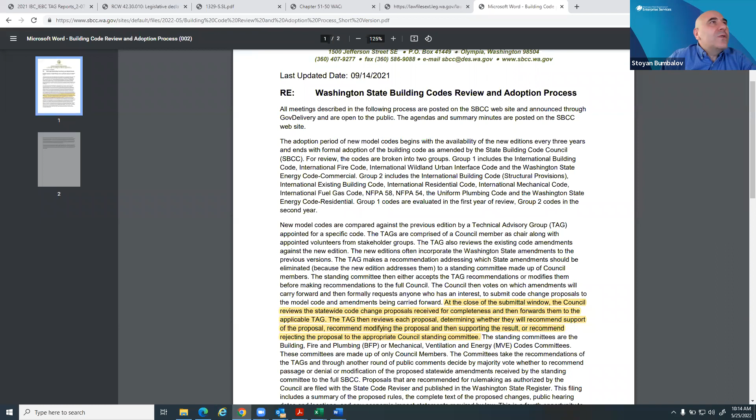Okay, and then we will start with the first proposal. I can hear my voice. Yeah.

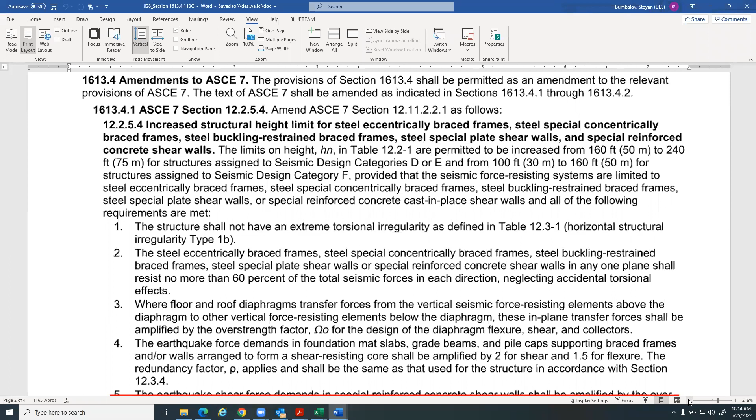I'm very pleased to present this proposal because it represents a big success of the State Building Code Council. The proposal removes an amplification for design forces for concrete shear walls. The State Building Code Council added this to the building code based on state-of-the-art research a few years ago, leading the nation in requiring amplified forces.

The reason I'm proposing to remove it now is because the national design building codes have caught up, and a similar requirement to amplify forces is included in the ACI 318 building code now. It's slightly different, but the intent is the same. So to avoid confusion, I'm proposing to remove this one line and three words that we see on the screen right now.

This proposal has been reviewed by a number of engineers. I see a couple of them are also here today. It's been proposed by design engineers as well as code officials, and we're in agreement that this line should be removed.

Just to clarify, the language you see here is section 1613.4. There was a little confusion at the previous meeting - this is a state amendment, not in the model code. It was adopted in the 2018 IBC. So what was previously added as a state amendment is being proposed to be removed. This isn't a change to the international code, the standard code - it's just a change to the Washington State Building Code amendments.

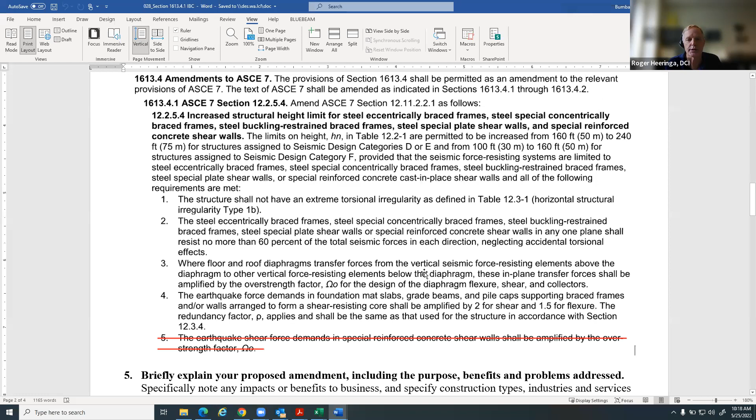Yeah, I will comment as a practicing engineer. I think if you go down to the very end of section 5, Stoyan, if you can page down - I think the critical comment as far as I'm concerned as a practicing engineer is that the second sentence of that larger paragraph, without removal of the section, it is unclear whether the factor referenced by the amendment and the factor referenced in the standard should be used together.

So the factor is you're basically increasing the shear demand on a wall by 2.5 times when you're actually designing a shear wall, and without removing it, there could be engineers and/or code officials who would enforce that you have to apply the 2.5 times twice. So it would be a factor of 5, or maybe even 6.25 if I do the math right. Very clearly, it is not intended that that factor of 2.5 get applied twice. So from my perspective as a practicing engineer, this makes complete sense.

Thank you, Roger. Andrew, please. I just wanted to also verify, as chair of the ACI 318 committee currently, that it was definitely our intention to insert the modification shown here on the screen for the same reasons that the state adopted the amendment originally. So we have essentially codified what the amendment was, so it should be removed from the current state amendment.

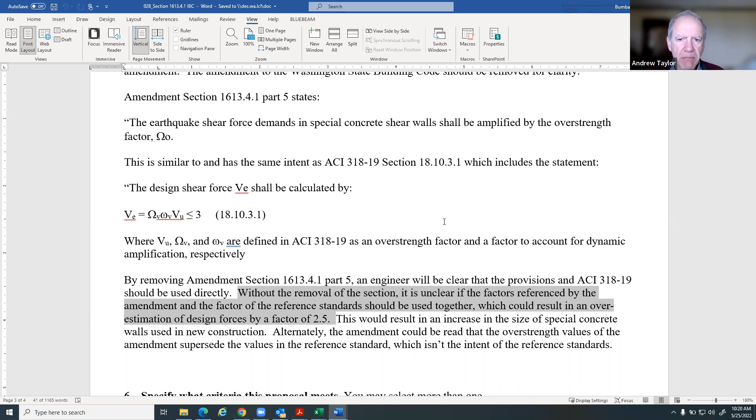Thank you, good comment. Anyone else? Okay, seeing none, the motion is to recommend, as I'm hearing, as written, as proposed.

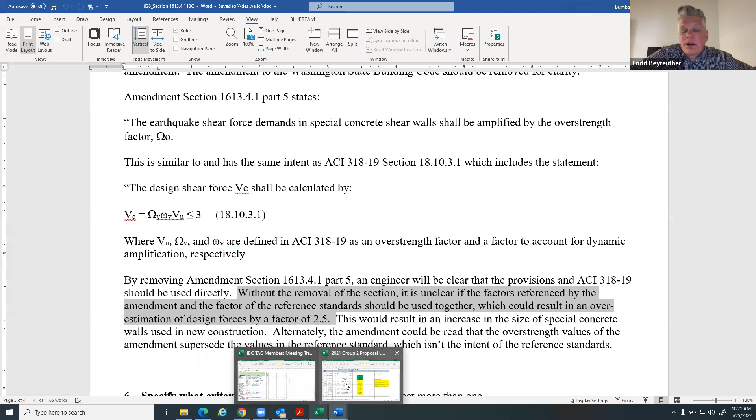Let's try a voice vote. All those in favor signify by saying aye. Aye, aye, aye, aye. Any opposed? Nay. Okay, then that passes. We will move forward for recommendation. Thank you.

Okay, second proposal for today, please - number 31. This is for tsunami loads. This is another one that is a state amendment.

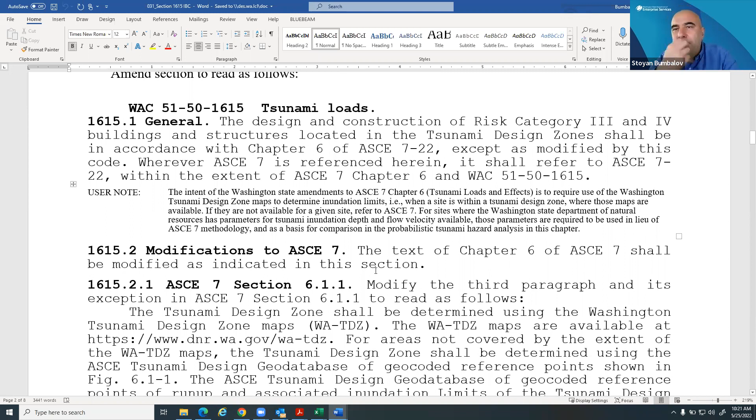There was an ad hoc tsunami TAG for a while, a very qualified group of stakeholders that I see some of on the line right now. So I see John Sue - would you like to speak to this, or Cale Ash?

Yeah, good morning Todd, I can speak to this one, and then maybe John can fill in any additional background. Thank you. So I'm Cale Ash, a structural engineer and principal at Degenkolb Engineers.

As Todd briefly noted, we were part of an ad hoc technical advisory group that formed about a year and a half ago, late 2020, to look at bringing some of the Washington Department of Natural Resources developed tsunami hazard maps into the Washington State Building Code. Those changes were made to the adoption of the 2018 IBC through emergency rulemaking, as I understand the process. The code change proposal here essentially extends the use of the Department of Natural Resources maps into the adoption of the 2021 IBC.

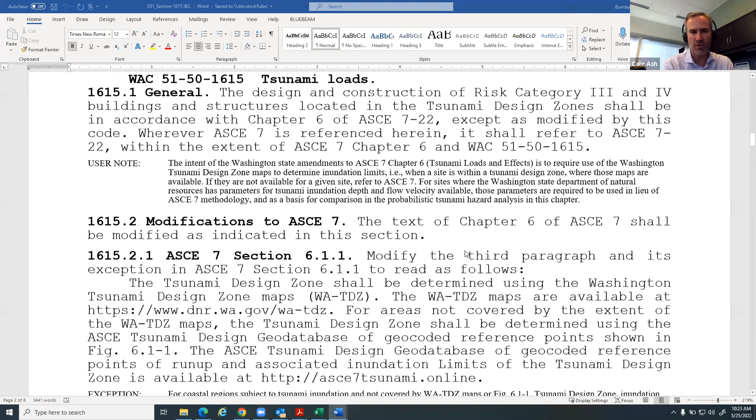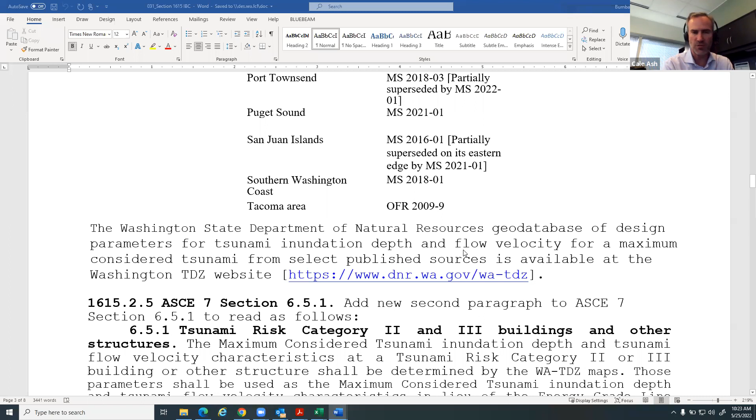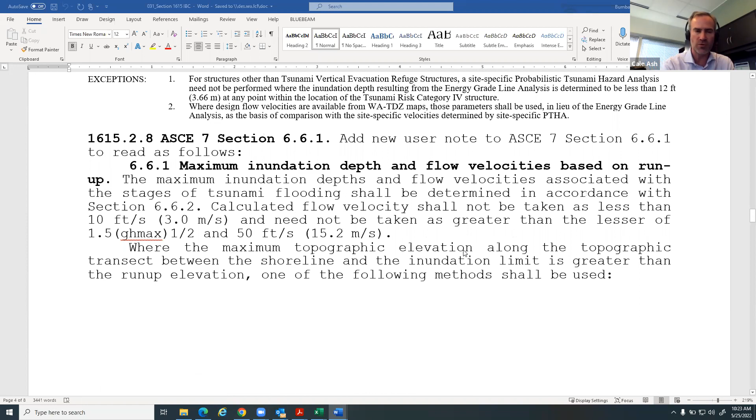The other main change proposed here is an early adoption of ASCE 7-22, Chapter 6, which deals with tsunami loads and effects for buildings. That chapter was just published in the ASCE 7-16 version, and there have been quite a few technical updates incorporated into the 7-22 version. So the code change proposal does two main things: adopts the Washington Department of Natural Resources tsunami hazard maps for design purposes, and represents an early adoption of the technical provisions in ASCE 7-22 for the state.

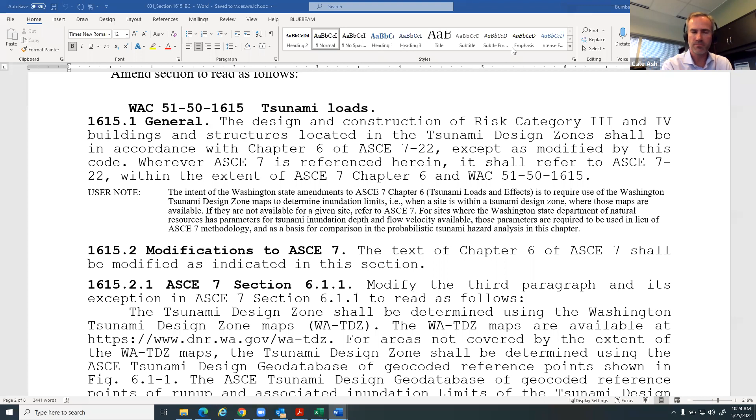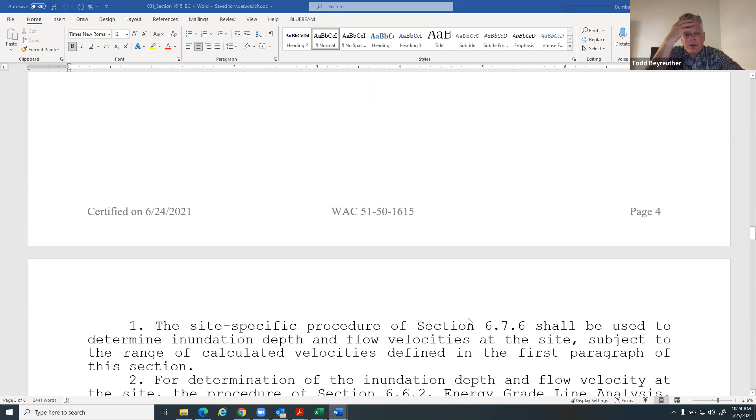Thank you, Kale. And just a little more background - so that ad hoc tsunami tag, we dissolved it after the temporary and permanent rulemaking was complete in the 2018 code. And so now this is a proposal for the 2021 code.

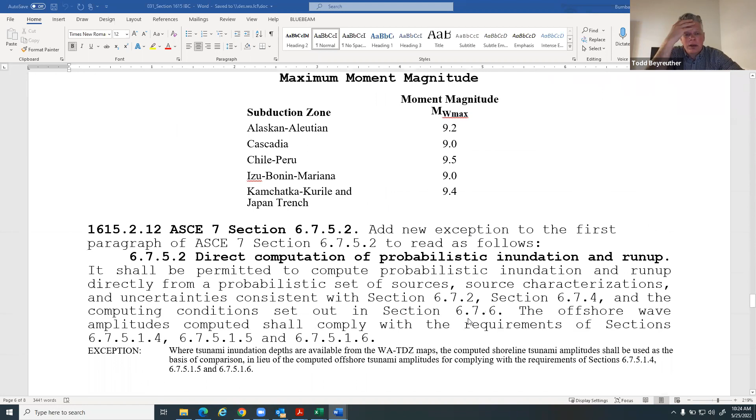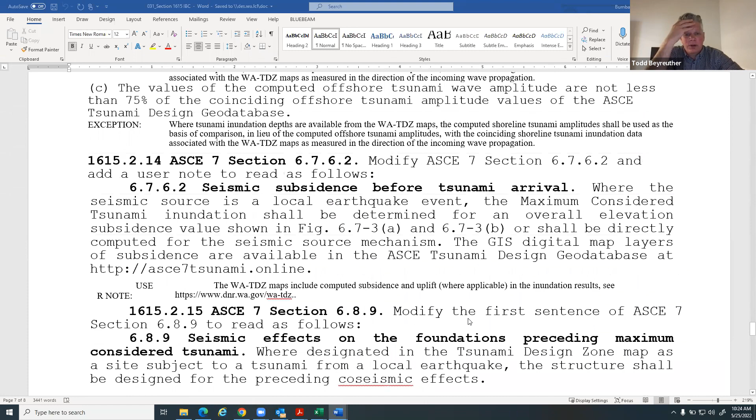Kale, or John, or Karina, can you advise us - this is meant to replace what is written now, it's not edits to that current amendment, right? This is intended to completely replace the section that's in the 2018, right? There are changes to this, right? Or is it just an update of the maps?

Yeah, John, can you step in? Yeah, I think the intent is - if I recall how you guys put it together - I think it is to replace the provisions that were there already, because we essentially are rewriting several of them due to the adoption, or pre-adoption, of ASCE 7-22 provisions. The other thing to clarify is that the Washington State DNR maps have been updated since the emergency rule and the permanent rulemaking was done.

And so we are adopting basically the latest maps that DNR has at this point in time. If you compare the list of maps, which is a little further down, it's a longer list. Essentially, at the time of the old tsunami tag, there were fewer maps available. Now DNR has extended it - the DNR maps cover pretty much everything in the state that's subject to tsunamis, except Point Roberts, I believe, which is the only one still outstanding.

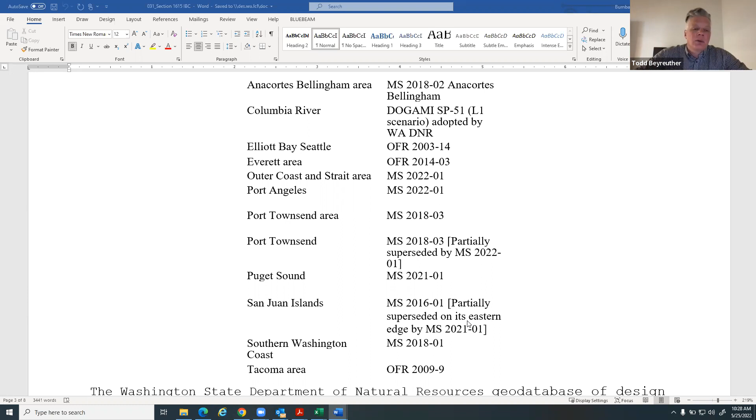Certainly. Stoyan, and for everyone's sake here, what we're talking about is this tag. The first step in group one was to go through and review the existing Washington State amendments in the 2018 code and determine what should carry over, and what should be overwritten by the 2021 code - either the model code, or in this case, overwritten by this proposal.

So do we need to take action on the master spreadsheet? Does the tag need to take action to strike that? No. My point here is, when we are introducing a proposal, we need to show the changes, right? So if we are deleting something, it needs to be shown with strikeout.

If it's new language as part of an existing proposal, it needs to be underlined. This proposal was submitted with no strikeout, no underline, so we consider this a brand new proposal that will replace the existing language. If this is the intent, we will follow that, showing the strikeout in WAC for the entire section and showing the new one. But if the intent was to keep the existing language and modify just parts of it, then we need to see it as underline and strikeout.

I think the question here is, my interpretation of this is a complete section. That's the way it was written. Yes, that's correct. Okay, good enough.

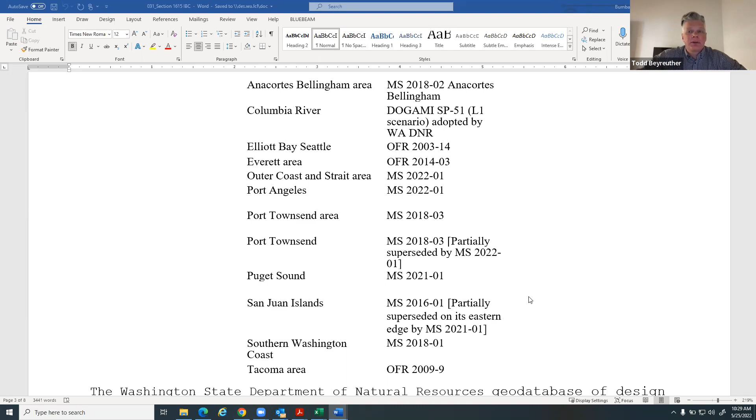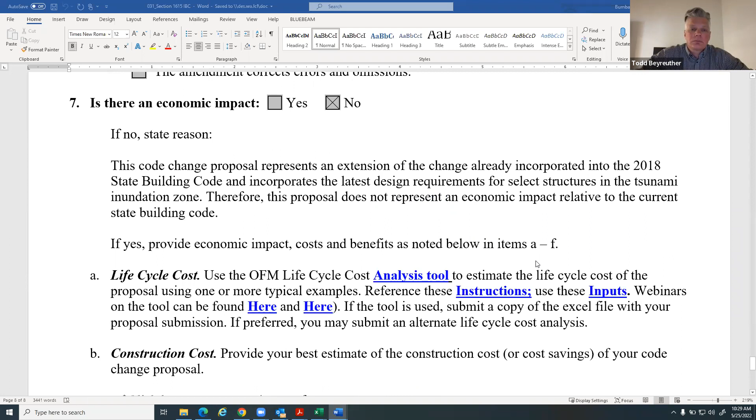Okay, thank you for that. I guess we haven't done a motion yet. Can we hear a motion to recommend this proposal to the BFP committee, please? This is Chris, I'll move to recommend it to the BFP. Thank you, Chris. Can we hear a second, please? This is Sue, I'll second. Thank you, Sue. Okay, any other deliberation, proposed amendments?

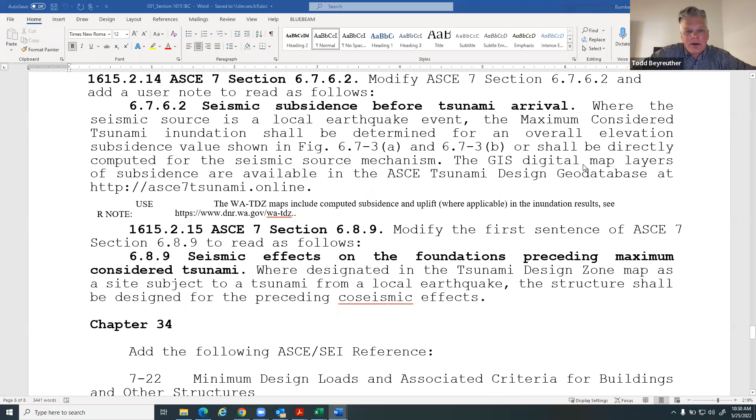I'll say that this has been a very thorough public process. I think it's a model of how the state should do this, in collaboration with other agencies and of course stakeholders. So strong support for this.

Roger, please. Yeah, I'm just wanting, in general, I understand, agree with it. I just want to make sure I understand exactly what section of which code we're taking out and what section of which code we're adding in. And that can be handled later if the tag is going to move it forward and the exact language gets worked out before final approval, that's fine. So I'm just asking for more clarity on the code process. The document itself and the information seems...

Sure, go ahead. Do you see the WAC 51-50-1615 on the screen? Okay, so this is what we currently have, this is what's codified. And the typical way is, if this existing amendment, which is a state amendment, a state addition to the code, is modified, we need to show the modifications with strikeout and underline. However, the proponent is proposing we strike out everything that is adopted here and replace it with that.

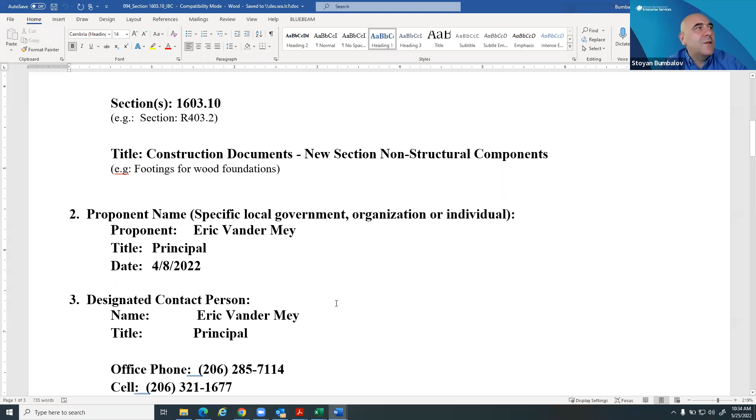The next one is 94, Section 1603. This is a new section, so for this one we don't currently have anything. It's a new proposal, section 1603.10.

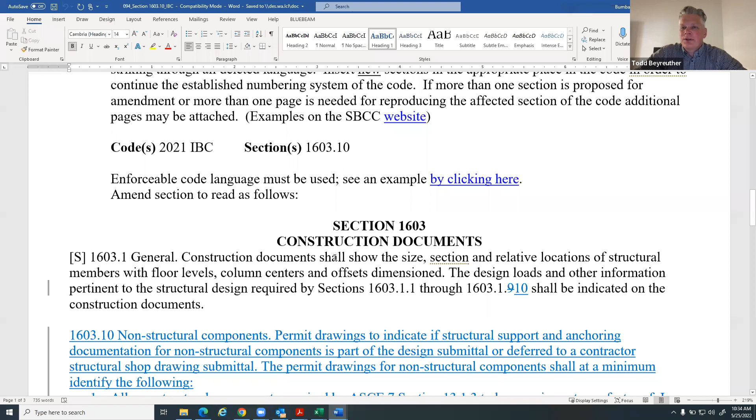Okay, do we have the proponent? The proponent is Eric. Oh right, okay, we tabled to wait for Eric. I see Eric on here. Eric, would you like to speak to your proposal? Yes, thanks. So this is a proposal to add a section. This was proposed under Group 1 and then withdrawn, and I was asked to propose it under Group 2. So the tag has seen this language a while back. I was asked to move it to this section, which documents the requirements on the drawing.

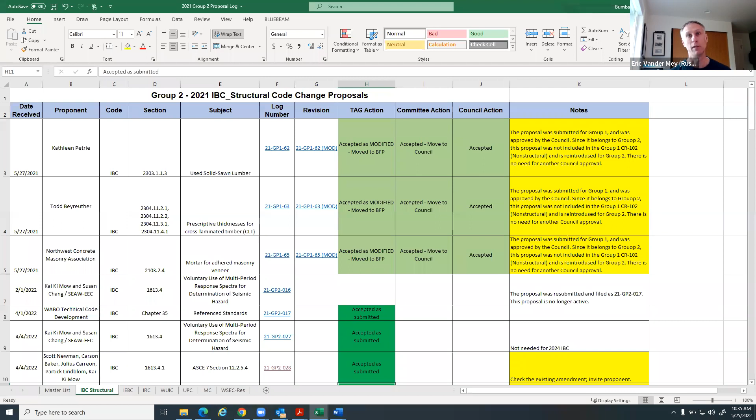So again, this is adding language to require permit drawing sets to include information about the non-structural components, specifically to indicate if the structural support and anchoring document is part of that design submittal, or if it's going to be deferred to a contractor shop drawing submittal. So that's kind of the first part.

And then specifically the drawings, whether mechanical, electrical, plumbing, or architectural, would need to indicate all components that they're interpreting for ASCE 7 - all non-structural components required to have an IP of 1.5, and anything required to be a designated seismic system.

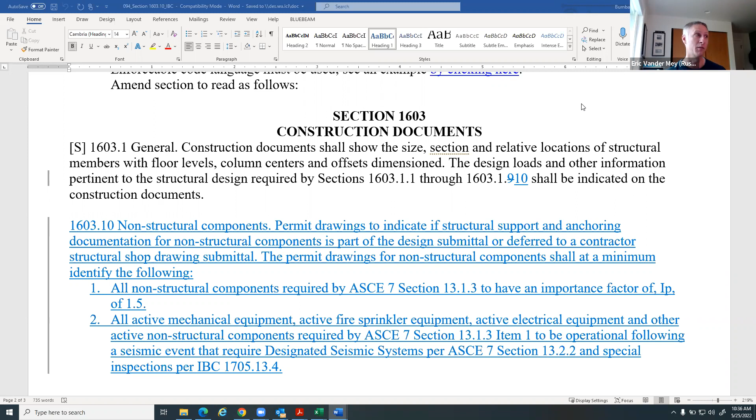This is trying to allow code officials to at least review how ASCE 7 is being interpreted on the project. We're seeing huge variation between jurisdictions in the state on how these sections are enforced for non-structural components - things like mechanical equipment, electrical equipment, generators, switch gear, stairs, and other components not directly part of the structural system.

There are requirements in ASCE 7 for seismic tie-down calculations and anchoring documentation, whether it has an IP of 1 or 1.5 as part of a life safety system, or part of a natural gas system like a boiler with an IP of 1. Some jurisdictions are interpreting that stairwell and elevator pressurization fans need to be active mechanical equipment, part of the designated seismic system, and operational post a seismic event.

By having this documentation in the plan set, it allows the code official to comment early on whether components are required to have this level of calculation and documentation. Some jurisdictions are requiring specific shake-table tested fans for pressurization fans - again, high variety around the state in what's being required. This is a first step in getting documentation into plan sets so we can improve enforcement around these code sections.

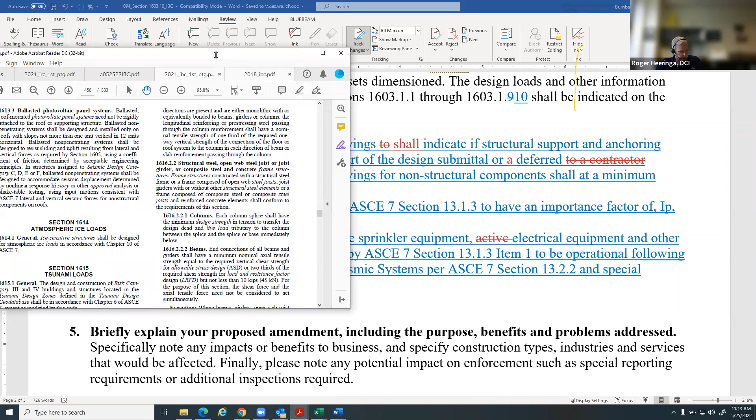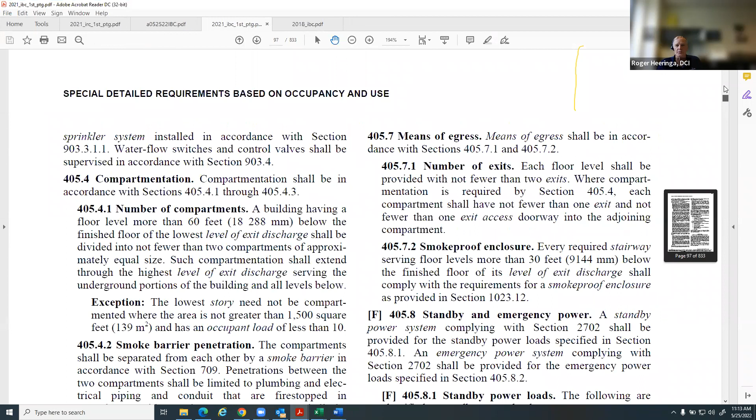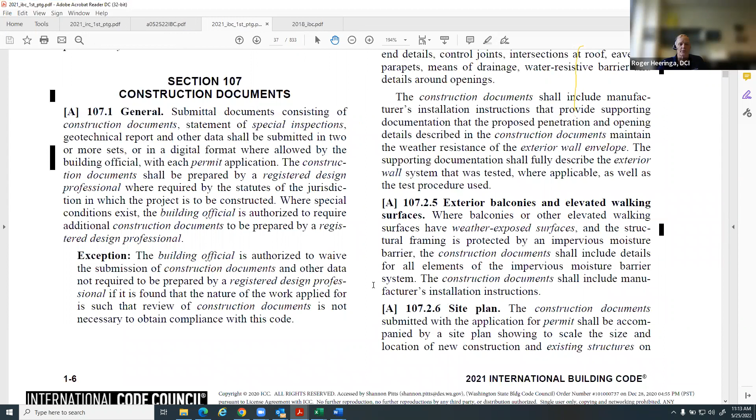107.2 is construction documents, and it kind of is defining construction documents. 107.3 is examination of documents, unless that's different in the 2021 IBC. I feel like this fits better in 107.2, where you're defining what needs to be included in the construction documents. Dorian has it up here.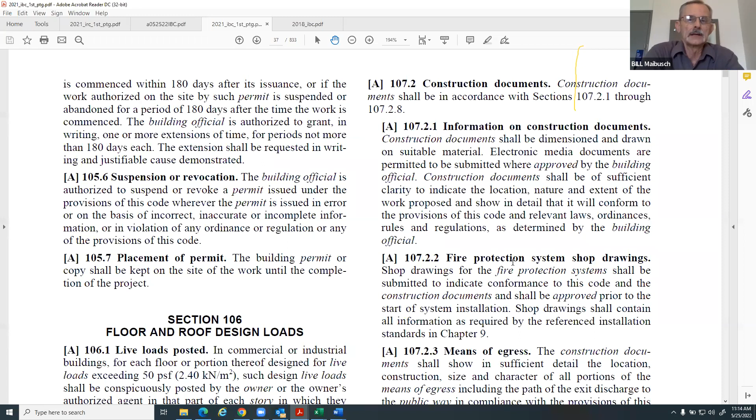So that's my comment. 107.2, I would agree. Bill, just a question. When you say all equipment, that sounds like a broad statement. Does that mean every piece of functional equipment in a particular building, or are we only talking about something required for fire life safety? Only the things in that statement that are required to be a designated seismic system, is the way the sentence reads, I think.

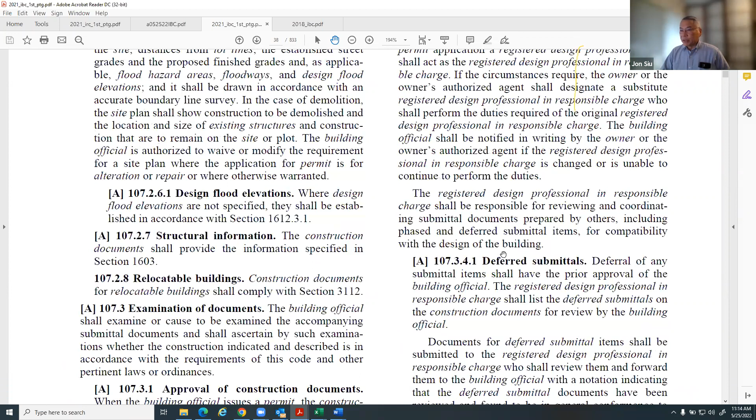Okay, thank you both, John. I want to suggest, actually Stoyan was there before, 107.2.7. It's on the next page there. Maybe as a part of that, or as a separate subsection to that, would be the appropriate place for this. 107.2.7.1, yeah, that would be the suggestion.

Okay, Scott. Well, John, 107.2.7 is again a section specifically related to the structural documents, so not this necessarily. I would disagree with that. Construction documents is not just structural. Well, no, 107.2.7, the title of that section is structural information. I know, but the titles are not enforceable, it never says anything. The titles are not enforceable, number one. Number two, again, this is structural information, right? It doesn't necessarily pin it to anybody.

Well, the language talks about non-structural systems. Yeah. It'd be a new section, 107.2.9, I guess. Or, yeah, I was going to propose that. I mean, 107.2.9, it's a different requirement, so that will fit in, I think.

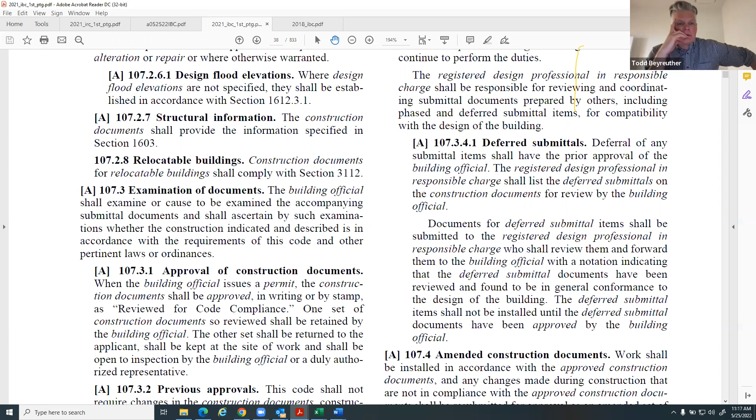So going back to the proposal then, Stoyan, I guess we've landed on this as section 107.2.8, correct? Okay, fair enough.

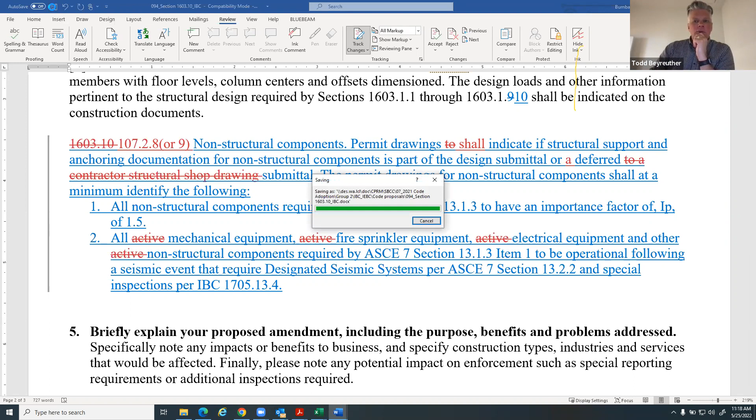Okay, are we in a good place? I guess I'll ask for a motion to recommend as modified to the BFP committee. I'll make that motion to move it to the BFP committee as modified. Thank you, Roger. We hear a second? This is Al, I'll second that motion. Thank you, Al. Okay, any final deliberation?

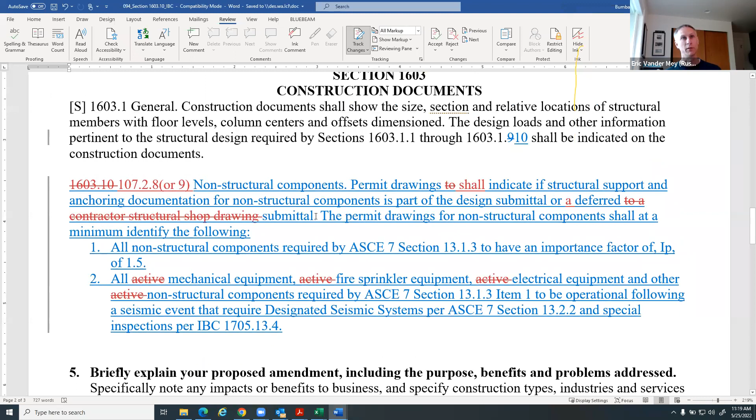All right, I got one more editorial comment. It probably should say construction documents and not permit drawings at the beginning, but could we go back to the Word doc, Stoyan, please? I don't know what that is. Can you say that again, Eric? Where the two instances where it says permit drawing, should it say construction documents?

Yeah, this is Roger. I think that it should, because that's what 107.2 is, construction documents. Okay, and the next sentence has that also. Is that agreeable to everyone? Okay, thank you.

Okay, if we're ready, all those in favor signify by saying aye. Aye. Aye. Any opposed, nay? Or abstentions? Okay, then that passes as modified.

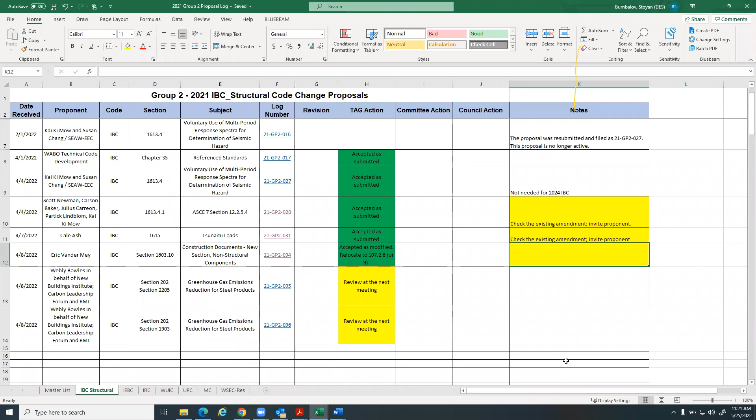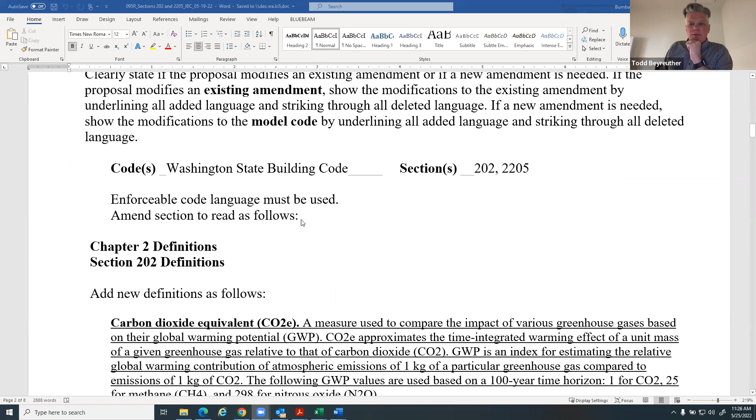Okay, thank you everyone, we're back with the building code tag, and we're going to hear the next two proposals, the last two that we tabled for the IBC. We tabled these two in particular to get more stakeholder engagement. I believe Webly is the proponent and was able to present to us last week. But Webly, is there anything you'd like to say before we jump into these?

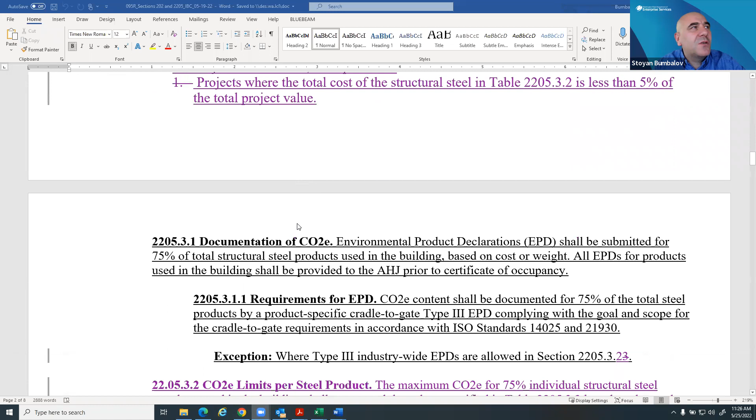Would you like... let me, sorry to cut you off. This is the proposal that was submitted. I mean, the modified proposal. Do you want me to show the modified proposals or the original submittals? Oh, okay, I'm sorry, I wasn't. You're right, good point, so between these meetings the proposal was modified. So yes, let's show the modified, please. Okay, here it is, unless there's...

And Webly, would Stoyan, do you want to speak to this first, or would you like the proponent to speak? Well, the proponent can specify what was changed and all details associated with it. Okay, Roger, do you have a?

Yes, Stoyan, can you just show on the website where that is located? I have not had a chance to look through the new one. So on the website, when you, it disappeared because we started the meeting, but when you click on see all events, it's okay. Going to that point, can we change that feature that once we start a meeting that we lose the? No, that's IT, we can't control that. So let's walk people through them to define the calendar you're looking at. So see all events, right? Yes, you need to click and see all events, because when the meeting starts, then it's no longer. It's a feature that we can't control, it's above our pay grade, I would say. I found it, okay, so sorry about that, I didn't think about this.

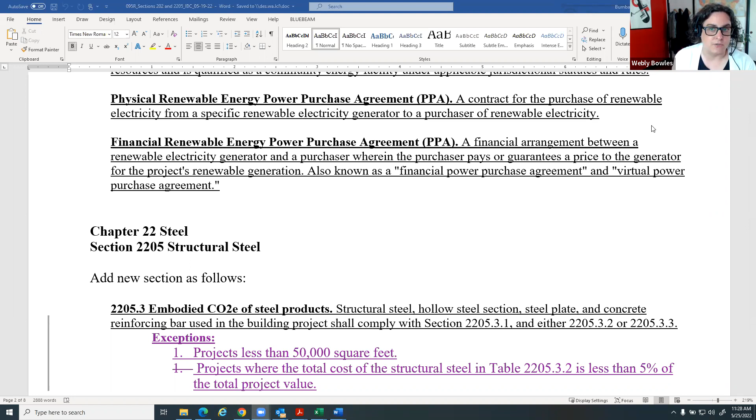So the code change proposal addresses the GHG emissions of the common construction materials that are used in large quantities, concrete and structural steel, and they support Washington's climate goals. So that's kind of the overarching thing here.

The proposal requires that ready mixed concrete mixes... wait, are you on steel? You're on steel first, which one do you want me to do? That's fine, no, I can do steel. Just want to make sure that we're looking at the same thing. So this, no, this, it's, I think it's section, oh yeah, sorry, yes, okay, I'm on steel, okay great.

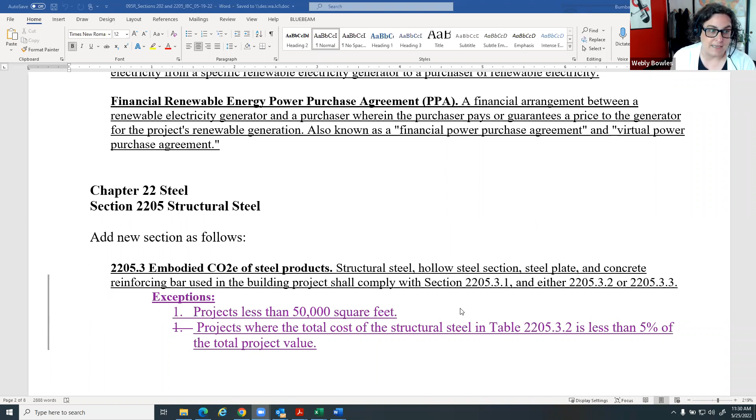Sorry about that. So this proposal has two main paths of compliance. I did reorganize this, so we have the definitions, and then the paths of compliance have been reorganized. So the first path is for 75% of a project's structural steel to meet specific global warming potential, or GWP, targets using environmental product declarations. The structural steel values are based on 175% of industry averages, and the rebar is based on the 75th percentile of US-based EPDs. So this option, as I mentioned, if you scroll down a little bit, it was moved up. So the main thing that's changed here, track changes looks like it's a new section, but it's not. Just wanted to change that for readability.

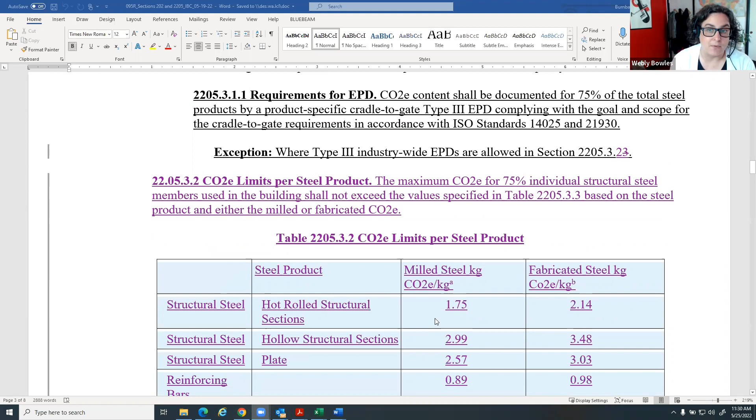The second option, which we think might be a little bit less popular in terms of use functionality, allows for projects to comply by procuring steel from plants that either use on-site renewable energy, purchase off-site renewables, or are enrolled in a US EPA Green Power Partner Program. Because steel is often dominated by the energy source, this option assumes that the GHG emission reduction is similar to what we're putting in the GWP requirements without that EPD documentation.

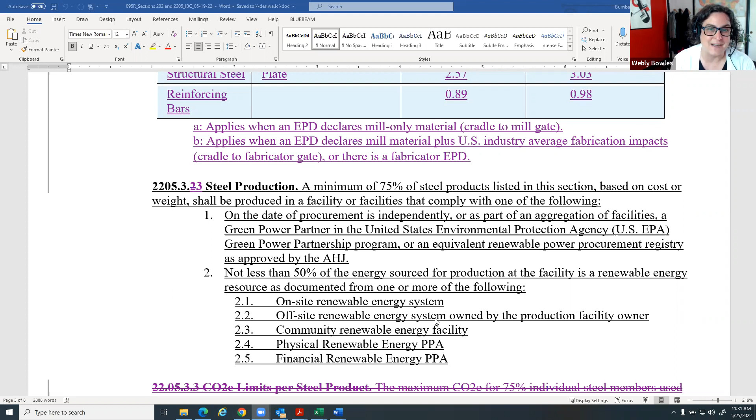So we've also included two exceptions to this proposal. Sorry to make you scroll around, but if you scroll back up, we have a couple of exclusions. One is that projects less than 50,000 square feet, this aligns with House Bill 1103. And projects where the total cost of the structural steel is less than 5% of the total project value. And that total project value is submitted with permitting, so it's an estimate on the cost of steel at that time. So we had to set that price point at some point in time. So that's what was proposed there.

So this responds to some of the comments that we heard last time that we want to exclude smaller projects from needing to comply with this. So I'll leave it there. I know you guys have some additional questions.

Well, before we get into questions, I think do you want to just roll right into the concrete one? Get them both on the table, please? Yep, okay, thank you.

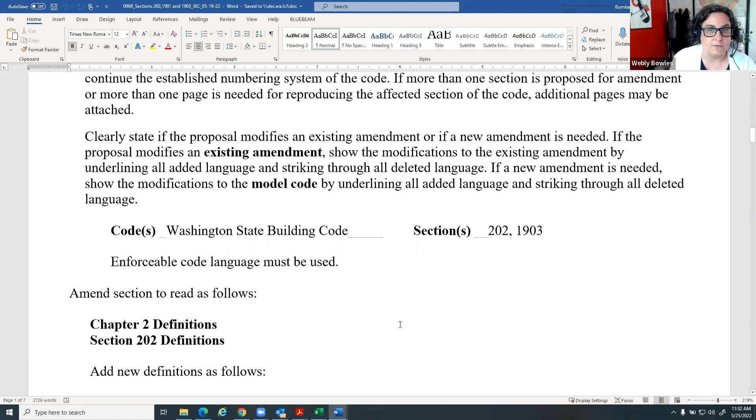So this one proposes that ready mixed concrete mixes meet specific global warming potential limits and document compliance through product-specific Type 3 EPDs, similar to the steel proposal. Exceptions include precast, shotcrete, and auger cast.

These are additions that help clarify that we're really only looking at ready mixed here. If other additions need to be included that were overlooked, we can add those.

Again, we have more exceptions for projects that are under 50,000 square feet and projects that use less than 50 cubic yards of total concrete. And that, again, is allowing projects that use less material to forego these requirements.

Also projects where no concrete providers have EPDs within 100 miles, and that's not putting undue burden on contractors who would need trucks to travel longer distances, potentially damaging that mix.

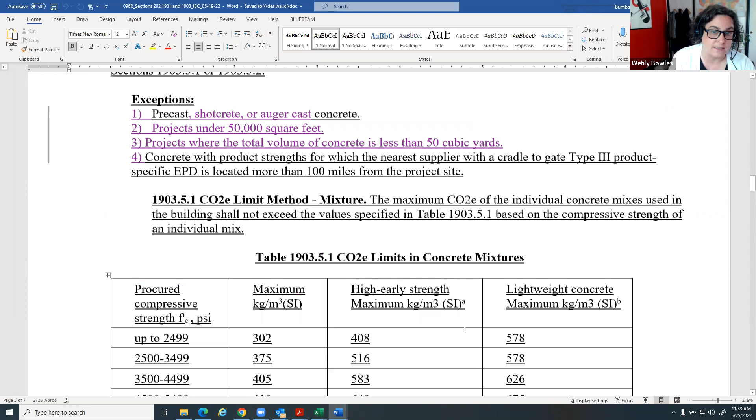And then we have a secondary compliance path that uses a weighted average for all the regulated concrete mixes to meet the GWP limits that are in that table there.

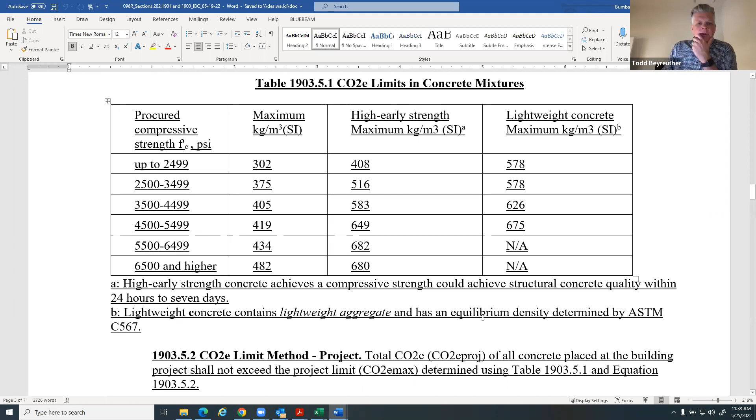Okay. Oops. Is that it on that one, probably? Yep. Thank you. Yep. Okay.

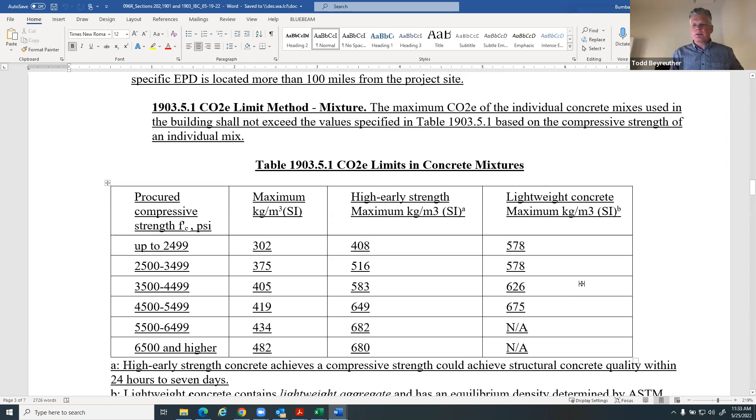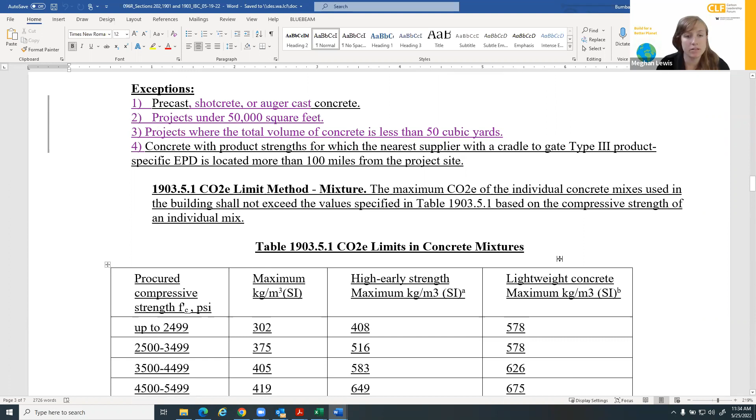So I also invited the other proponents to this, specifically from Carbon Leadership Forum. Meghan, are you interested in speaking to this? I don't have anything to add at this time, but I'm happy to answer questions during the discussion. Great, thank you for that.

And Meghan, there's a third co-proponent, right? Yeah, RMI is not on the call today.

Okay, thank you. Okay, before we get into this, let's talk about what an action by this TAG could mean. So if this moves forward, there are a couple of things we can do: recommend as proposed, reject the proposal from moving forward, or modify it.

But I also like to put out there that the State Building Code Council has rulemaking authority as granted by the legislature. This TAG does not. This is an advisory body. So even if it does move forward with a majority vote in some format, we can move it forward for the BFP to dive deeper, modify, and obviously take testimony.

So this is the beginning of the road for sure, and there are a lot of options here of what we recommend to the BFP. This is a common practice on the energy side where we give our recommendations of how the BFP should address this. So I just want to put that on the table. That is not necessarily a hard recommendation if it's a split vote.

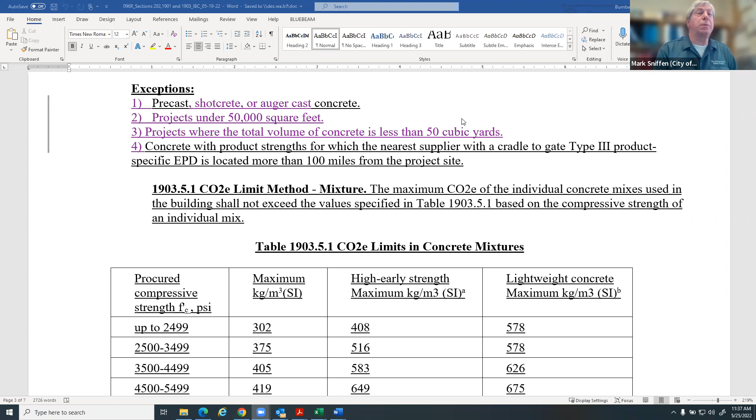Okay, thank you, Mark. Tim? Yeah, this is Tim with AGC. Stoyan, have you had your attorney review these two proposals? No. Okay.

Significant amount of folks on the call think there's a problem with that, and so I just want to mention that the Building Code Council's governing statute in RCW specifically prevents the council from adopting codes that would provide unwarranted preferential treatment to certain building materials. So I want you to be aware of that, Stoyan, and I think between now and the next committee meeting you ought to have your attorney look at that. I think that would be warranted, definitely.

Okay, thank you, Tim, and I see Andrea's hand up. Andrea, let's just reestablish that reference—was it RCW? Yeah, let me look it up really fast. Okay, well, no hurry, we can come back to it. Okay, thank you, Tim.

Okay, here we go. Oh no, I'm sorry, you're not ready. Okay, let's go to Matt. We'll come back to that, Andrea. Thank you.

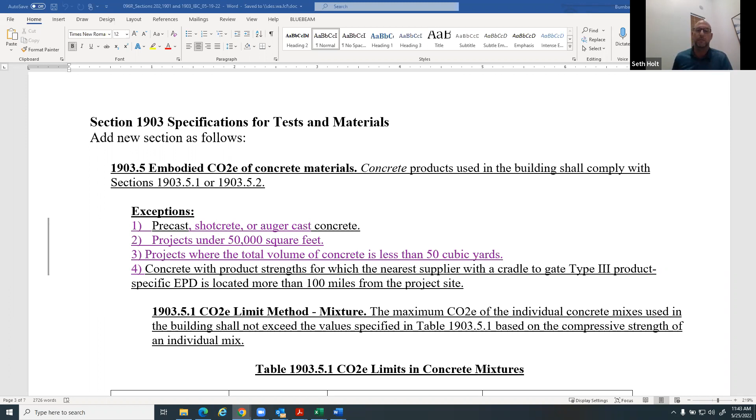During the last TAG meeting, on May 11th, we did a little research and data collection using the EC3 carbon accounting tool found through Carbon Leadership Forum's website, under the heading product selection and procurement, so we could assume these statistics are based on that. It came directly from one of the proponents' websites. Washington State as a whole has 2,346 Type 3 product-specific EPDs directly related to cast-in-place concrete under CSI Division 033000, which is exactly what we're focusing on today.

Most of this data is based around metropolitan areas, King County especially, a little bit focusing on Clark County, but major metropolitan areas, which make up 72% of this data statewide. So the issue with reporting itself really reflects the fact that there are many concrete producers statewide who are not represented in the proponent's statistics and cap limit, barring they use the EC3 data sets. And this was confirmed by the proponent in the last TAG meeting, this data was true.

Western Washington has the bulk of this data. The distance and proximity of the supply chain, as Matt alluded to, and advantages on EPDs favor metropolitan areas based on production facilities utilizing marine and rail transport available for cement, slag, and fly ash, or better known as cementitious materials. In the statistics tool, it's called the supply chain uncertainty factor. That does not include the addition of supply chain disruptions, shortages, inflation, embargoes, and demand for imported or modified logistic plans for materials.

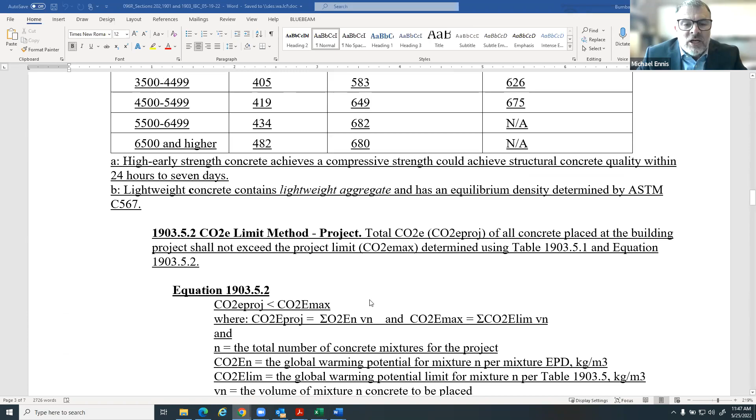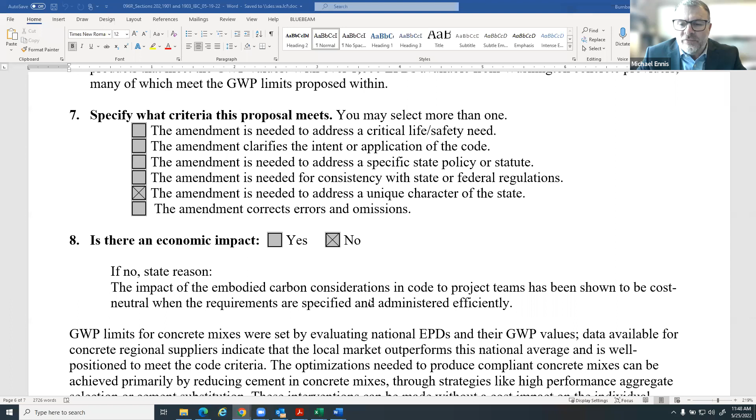I have a number of members who you've heard from already and will likely hear from in the future who disagree with the concept that there won't be cost impacts in the industry. I don't think you should just take the word of the proponent that there won't be and move something forward without doing due diligence and understanding whether there actually will be or not. I'm being told there is, and I would urge this body to do additional research to get to the bottom of that issue. I'm available for questions, and if you have any questions or comments, please feel free to reach out.

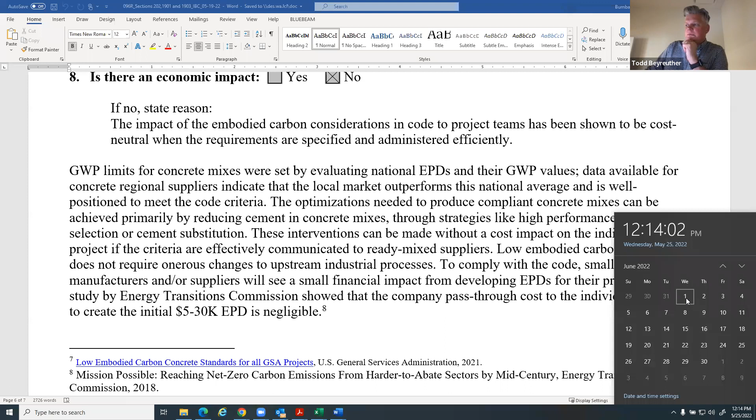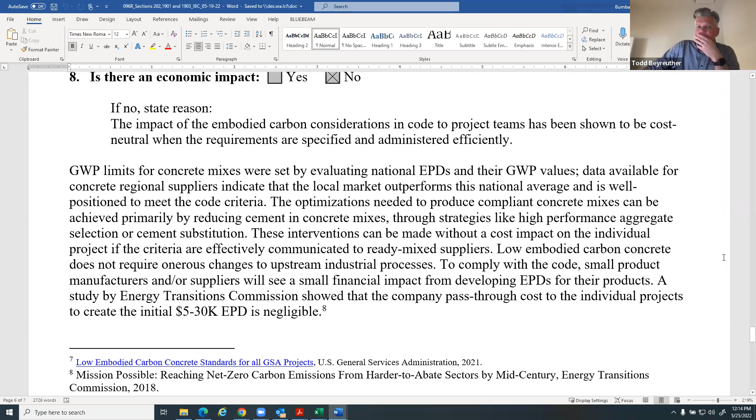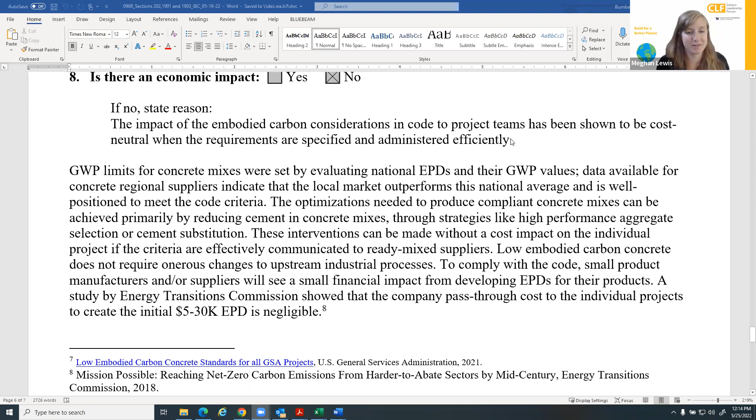Todd, I just wanted one quick comment. Meghan, can you confirm whether the limits that Max is referring to were updated after the previous meeting? Yes, I believe that was an error, and he's 100% correct. They were the industry average, not 175%, and now have been updated.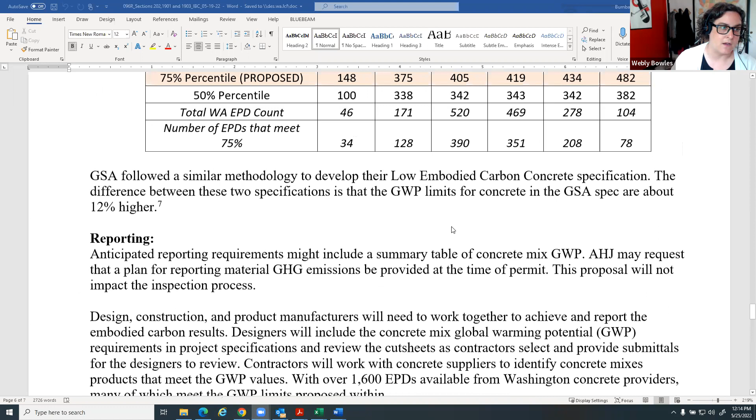Megan, thanks for stepping in there. Yes, that's correct, we did update the values, and they are based on what AISC published. I don't think any of those numbers are wrong, and it aligns with the values being used for Buy Clean, so we're trying to be consistent in that policy.

And if I can just state one more thing, at IBC the proposal was not voted down because it did not fit in the IBC. People testified against that, but that was not one of the reasons why it was voted down.

Webly, can you expand a little bit on that, by chance? Sure, I don't have the full reasons, but they listed 3 reasons why it was voted down, and one of those was concern that the majority of the products already complied with the requirements, so it wasn't necessary within the building code. There was another reason, but it was not related to it not fitting within the IBC.

The IBC preserves public health and safety and provides safeguards from hazards associated with the built environment, and that's where we see this fits in, addressing climate change through products.

Okay, thank you. Is there by chance any rebuttal to that from the previous testimony? Okay, if not, just raise your hand. All right, if so, I'm sorry.

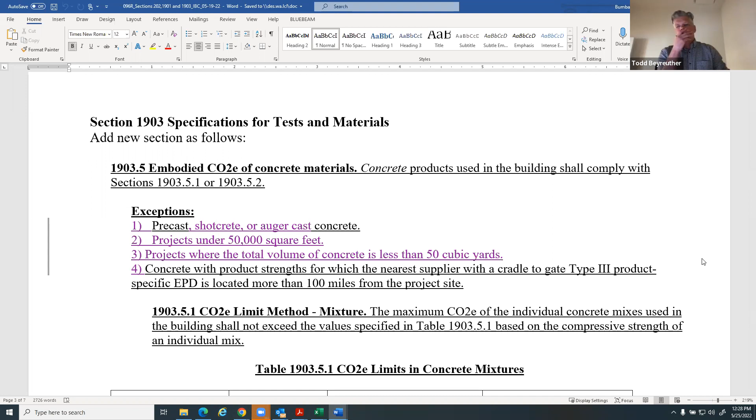We, as the Miller Hull Partnership, signed on to a letter that was sent to the TAG yesterday, co-signed by the Blue Green Alliance and also the Washington Environmental Council. I'm speaking today on behalf of my colleague at Miller Hull, Alex Yanchenko. Jess Koski covered a lot of what's in that letter, but I thought I'd provide a little additional context from my perspective about this work.

We currently rely on highly abstract models and assumptions for modeling greenhouse gas emissions in our structural systems when we design buildings. Product and supplier specific EPDs really provide us a pathway to measure, manage, and reduce those impacts. And I'd say those are impacts that we design, procure, and build as a team - as a contractor, client, owner, architect, and engineer.

I'm also speaking today as a practitioner who's specified building product material disclosures on public projects for over 5 years - K-12 schools, higher ed, even DES projects. So both ingredient reporting, but also EPDs. I will say the majority of this was done for products that are manufacturer specific, like an Armstrong ceiling tile or a metal stud from Clark Dietrich.

I don't want to underestimate something that was previously brought up about how nuanced the web is around the commodity products of concrete and structural steel. So I'm really glad to have people a lot smarter at this working hard, not just in the legislature that's been talked about, but also at the Carbon Leadership Forum, to put forward the right kind of structure for us to continue to reduce our emissions.

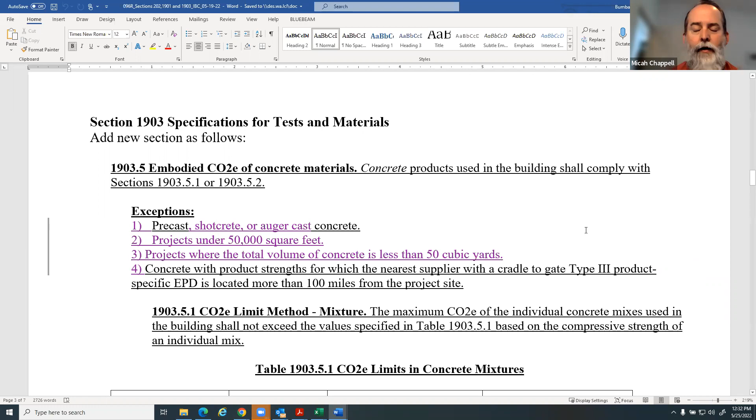But getting to the technical merits of this, if we want to move up to the definitions on the concrete proposal, you're talking about cementitious materials. You're providing a definition here that you aren't even using in your proposal. That language is not found in your proposal.

Then we move on to concrete. Concrete already has a very thorough and vetted definition in the building code and has for some time. This doesn't really align with what is currently adopted and vetted through the national process for the definition of concrete. Then we move into the carbon dioxide equivalent information - you do provide that definition, but then you also create another definition within that definition for global warming potential. That's the second part of that paragraph, or second part of that definition.

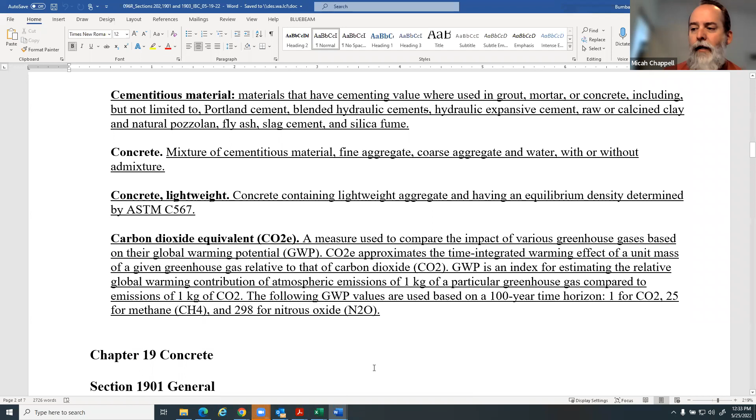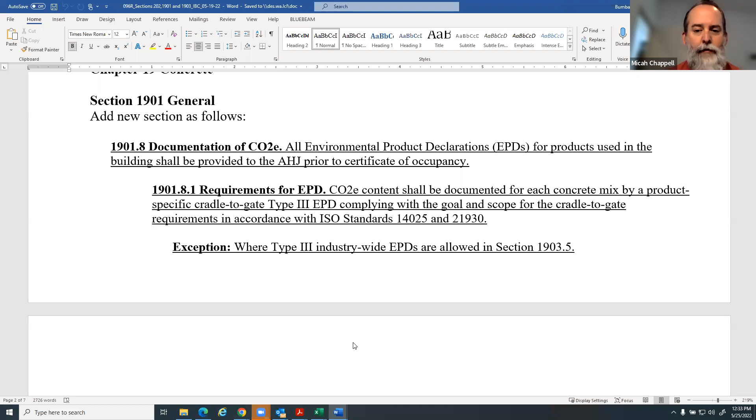Moving down into the main body of your proposal, you get into some stuff that has a lot of information that's just not enforceable. We're looking at distances to project sites, all these different measurements and mixtures. This stuff is just not going to be able to be tracked by a building department or code official.

Moving over to the steel proposal, we get into some definitions that don't make real sense on something that's actually enforceable. You're giving us definitions of contracts. The code official is not going to review or enforce your contract. Even though maybe that's not how it seems, that is definitely how it's somewhat written once you get further down.

Then there's the carbon dioxide equivalent here, same problem as the previous proposal for your definition. You're providing a definition within a definition. If you want the definition of global warming potential, create that as a separate definition. And we do try to steer away from having requirements within definitions.

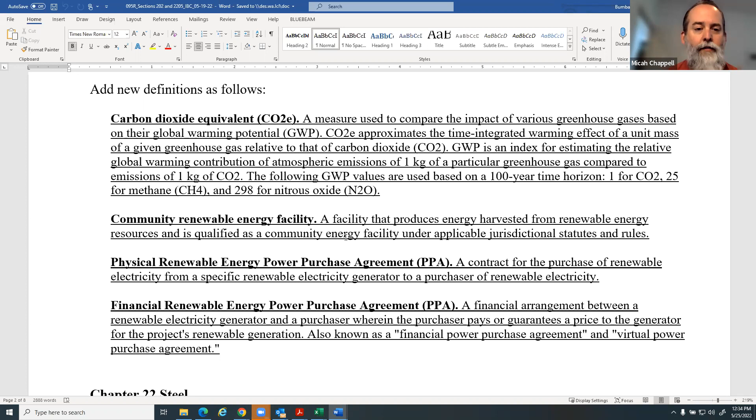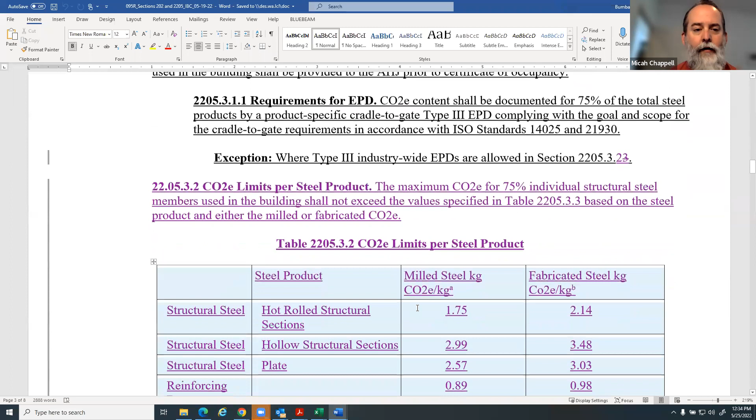Moving further down into the steel proposal, I do have some struggles. Again, you're indicating that contracts under section 2205.3.2 for steel production need to be provided to the code official. You can scroll down just a little farther, Stoyan, under 2 point, right there. You're indicating that these contracts need to be provided for steel production, mind you. This is not installation or some other type of standard for this steel.

You're actually requiring that a contract for steel production be provided to the code official, and I'm sorry, that doesn't work. This is just not the place for this. Again, the building code needs to be enforceable, and this is not enforceable. So I'm going to recommend that the tag not move this forward. And if it does come up at the council without significant changes, at that time I will reevaluate whether or not I would vote against it based on additional input from other code officials. So thank you for your time.

Thank you, Micah. Bruce, please. Thank you, Todd. Yes, sir. I don't mean to take more time than allotted, but I know there's others.

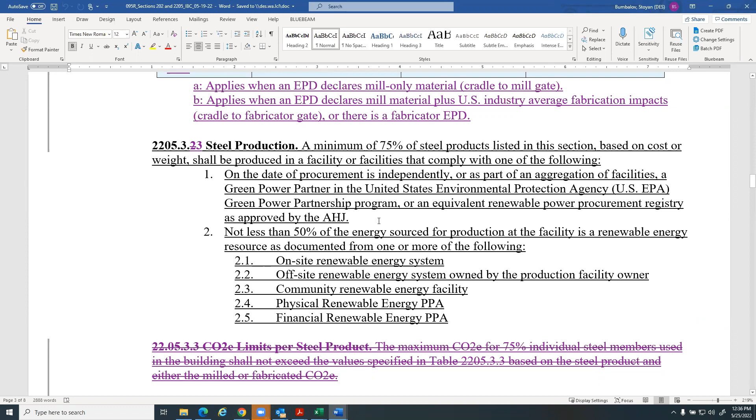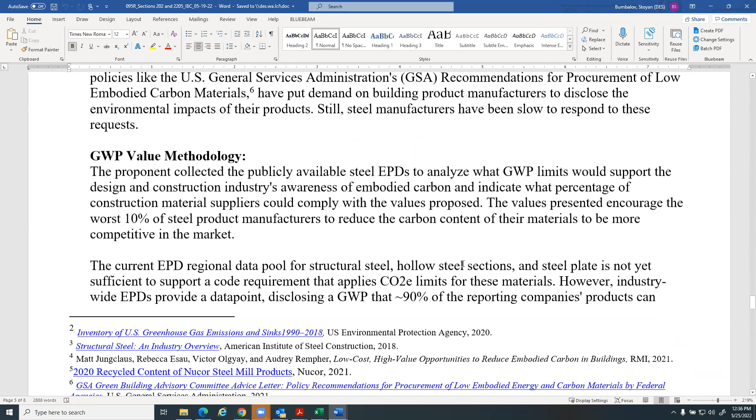Thank you for that, Bruce. Can I clarify something here? Please do.

When we get the proposal, we are using the data in the proposal for the preliminary cost benefit analysis. And if we find something that's not right, we provide, in addition to the submitted cost benefit analysis, our own staff opinion. When you folks are saying the cost benefit analysis is not accurate, but you're not submitting anything, then we have on one side somebody saying there is no cost associated with it, and on the other side someone saying there is cost associated with it, but we don't have any justification. So we will do our best and research it, but it doesn't mean we'll find something. That's what I was trying to clarify. And we have an obligation to do two things: the cost benefit analysis and the small business economic impact statement. So these are two different things.

Sorry, I appreciate that. I just think it would be unwise for the Code Council in rulemaking to rely on direct input from others when rulemaking may require any agency to be able to do the SBIS on their own. You can be misled easily one way or the other on who's going to provide you numbers for whatever purpose they provide them. That's my suggestion. This is why we have these technical advisory groups. This is why we have the public comment period. This is why we have the testimony, and this is why all these meetings are open and we are listening to all this.

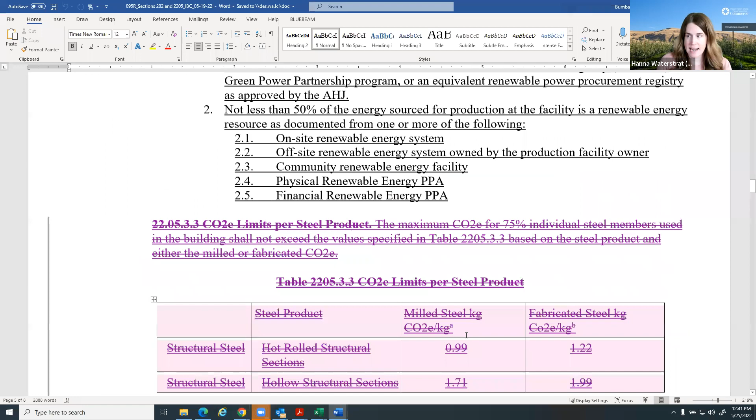Minimizing embodied carbon in the built environment is a priority highlighted by the 2021 State Energy Strategy, which identifies the opportunity to leverage state capital projects and work to align the state project and budget development process to support achieving reductions in greenhouse gas emissions.

We have submitted a progress report on this work that is available on our website and on the CLF website, and the final legislative report is due in November.

We're confident that this report and the work leading up to it will provide some insight on how best to move forward with embodied carbon legislation and help us figure out how to structure data tracking, compliance, and reporting efforts in the future.

I really do appreciate all of the input provided by everyone today. Another thing is that we do think that having ongoing stakeholder engagement with state agencies, environmental groups, industry, manufacturing, and labor associations could strengthen elements of future embodied carbon policy.

And help boost market availability for lower carbon materials. So that's it, thank you for allowing me the opportunity to chime in here.

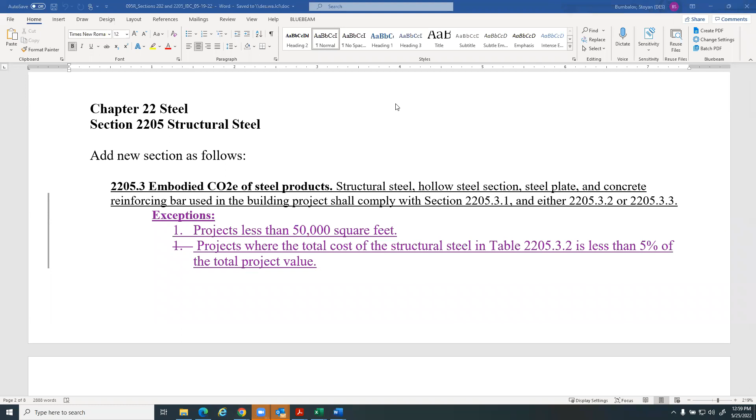Okay, so, thank you. I personally am interested in diving deeper on that. Thank you, no problem, we'll save our comments for the next time. Thank you, okay, appreciate that, Matt, Bruce.